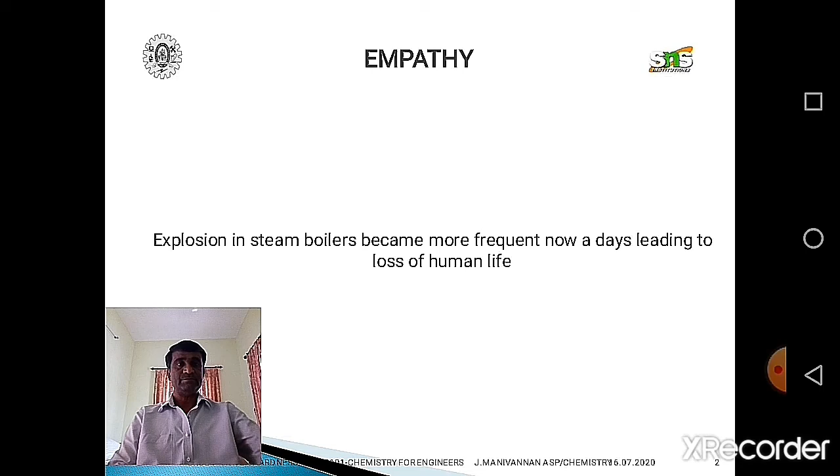Empathy part. Explosions in steam boilers have become more frequent nowadays, leading to loss of human life. We know the two important applications of water in industry. One is for heating purpose, where the water is used for generation of steam, and the second important application of water in industry is for cooling purpose, where it is used in cooling towers and the cold water is used for cooling of reactors, vessels and all.

In thermal power plants, the fuel coal is used to generate steam from water, and high pressure steam goes and runs the turbine, which in turn runs the generator to generate electricity. So water is required for generation of steam, but whatever water is available cannot be used in a steam boiler. We need good quality boiler feed water. If the quality of the water is poor, it has got its own consequences.

Now let us see what are the causes of boiler explosion. Poor water treatment prior to using the water as boiler feed water, and because of that there will be scale and sludge formation, boiler corrosion. These are related to water. Then overheating, low water level, and safety valve malfunctioning.

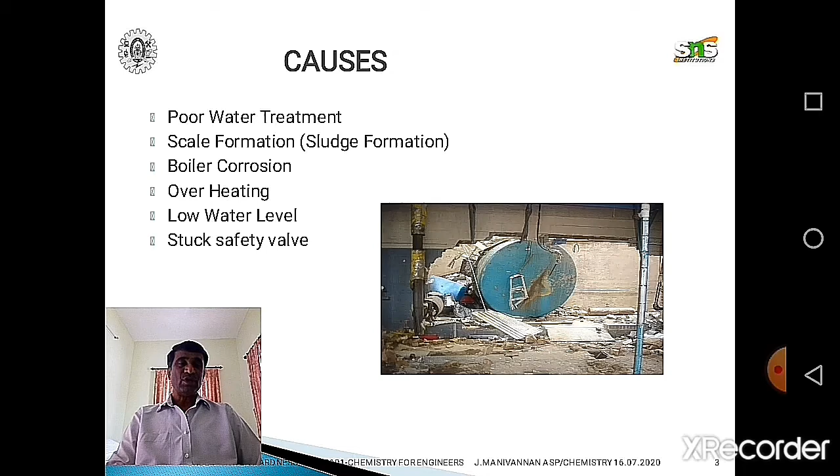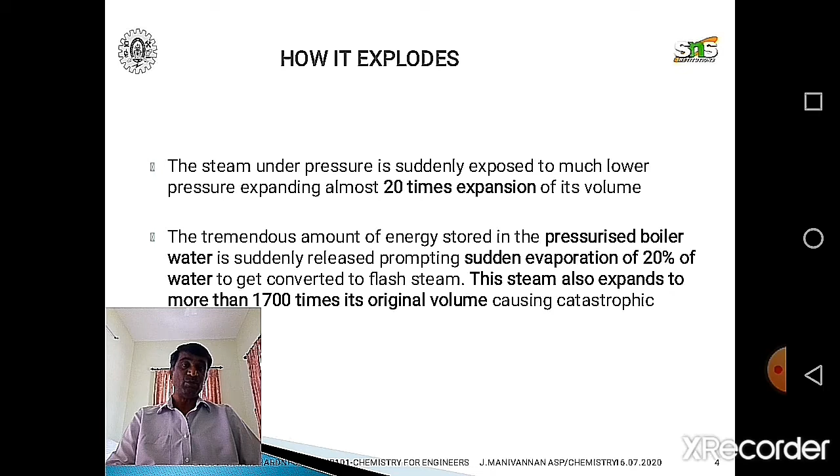How does it explode? The steam which is under pressure, when it gets a vent, expands 20 times, and also the remaining hot water also expands; at least 20% of the water becomes steam, boiling water, which expands 1700 times. So the amount of expansion will be severe, which leads to explosion.

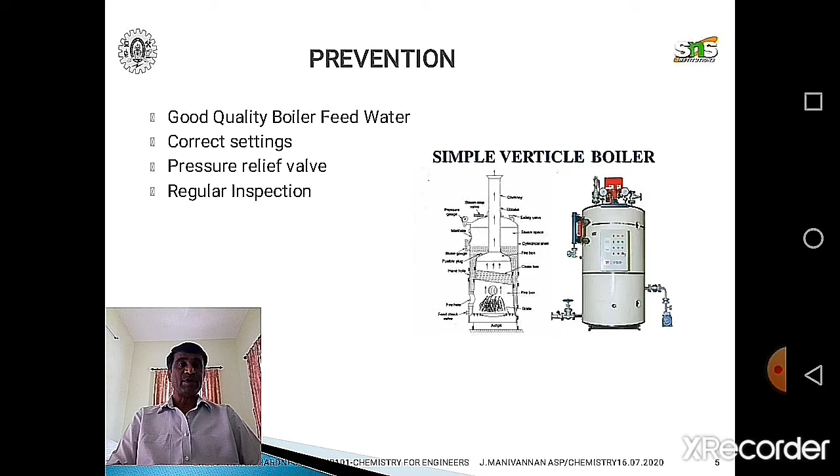How to prevent boiler explosion? We need to use good quality boiler feed water, correct settings, pressure relief valve, proper functioning of the pressure release valve, regular inspection. Now let us come to the quality of water.

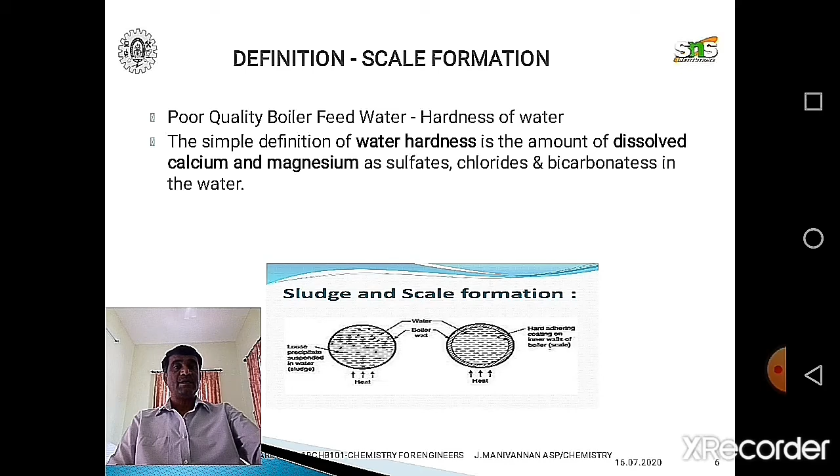The water available for usage may not be good water. The main quality problem of water is due to its hardness. The hardness is due to presence of calcium and magnesium salts as sulfates, chlorides and bicarbonates. They form either sludge or scale. Sludge is nothing but floating precipitates, or precipitates in the suspended form. And scale is the formation of an adhering coating on the inner walls of the boiler.

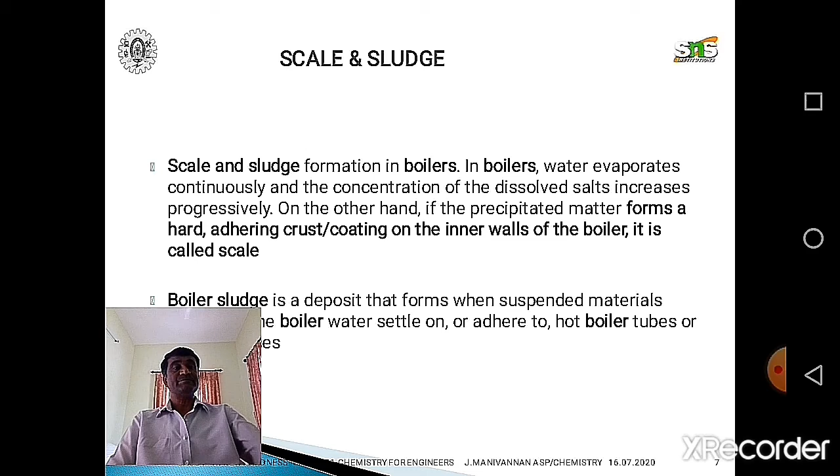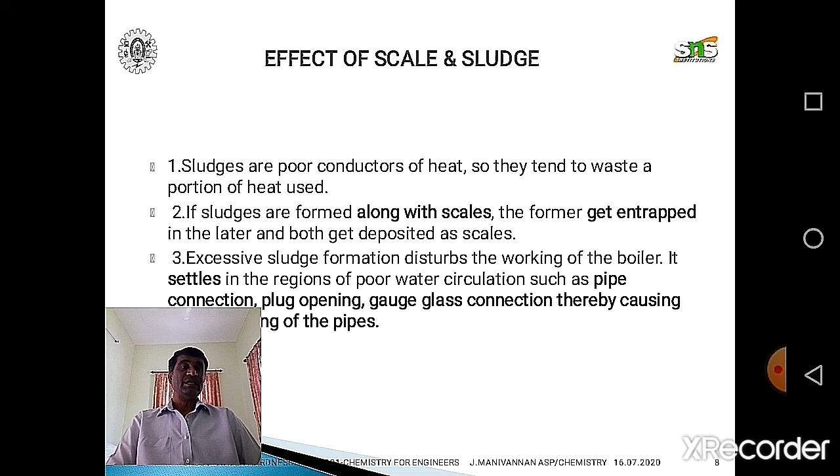What are the effects of this scale and sludge? Sludges are poor conductors. They tend to waste a portion of heat, and along with scales they get entrapped in various pipe connections, plugs, gauges, thereby creating problems. But the scale, which forms a hard coating on the inner walls of the boiler, being an insulator, reduces the amount of heat transferred. So we need to heat more to generate the required steam.

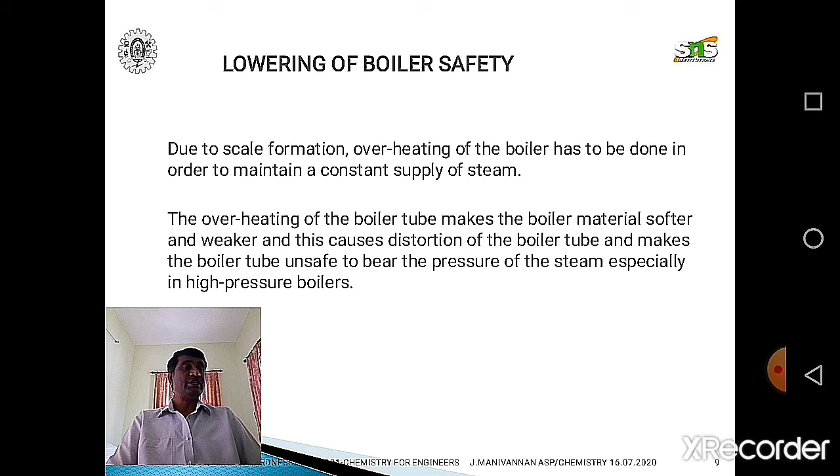The temperature is increased, which in turn means we use a lot of fuel, wastage of fuel, and in extreme cases, when the coating of this scale becomes thicker and thicker, at a stage some part of this scale gets broken, and that part gets exposed to very high temperature, which leads to sudden formation of a higher quantity of steam, which leads to boiler explosion. So we need to use proper quality boiler feed water.

There are two important methods by which the water is treated and then used as boiler feed water. One method is the demineralization process, where the water is made to pass through two types of resins: one cation exchange resin, another an anion exchange resin. The cation exchange resins have exchangeable hydrogen ions, which replace the cations with hydrogen. That means the resin takes up the cations from the water and gives out hydrogen ions.

And then that water passes through the anion exchange resin, where the resin takes up the anions and gives out hydroxyl ions. So when the water passes through these two resins, all the cations and anions will be removed.

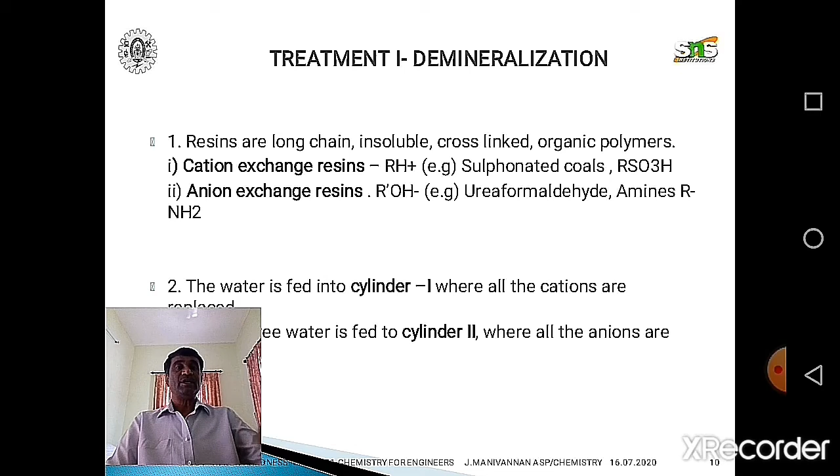And the water goes to the second chamber, where all the anions, sulfates, chlorides, etc. are absorbed by the resins and it gives out the hydroxyl ion. The hydrogen ion and the hydroxyl ion combine to form water, and all the water which is coming out of the second chamber will be free from both cations and anions.

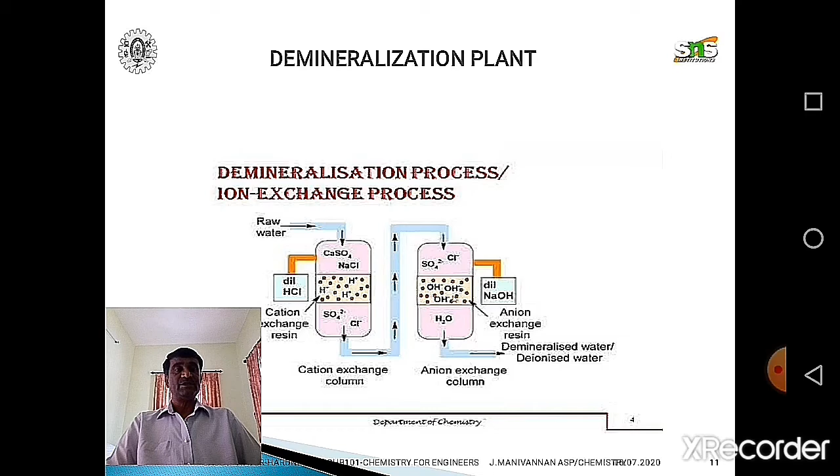So by the demineralization process or deionization process, it's also called a soft water plant, all the ions, both cations and anions, will be removed. It is free from all the ions, and is used as boiler feed water. But when you need very high pressure steam, where the temperature is very high and pressure is very high, we need still much better quality of water.

So for this purpose, reverse osmosis is better than the deionization process. The deionization process only removes the cations and anions, which is good enough. But if you want still purer water, the water is passed through the RO process. RO is called reverse osmosis.

Osmosis: when a solvent and a solution are separated by a semi-permeable membrane, the solvent will flow into the solution. This is called osmosis. But when we apply excess pressure in the opposite direction, that is on the solution side, the solution contains both solvent plus solute, the substances, salts.

So when you apply excess pressure, the solvent from the solution gets separated and goes out to the solvent. That means from the impure water, pure water goes through the semi-permeable membrane to the pure water side. So you get pure water out of it. All the impurities are removed.

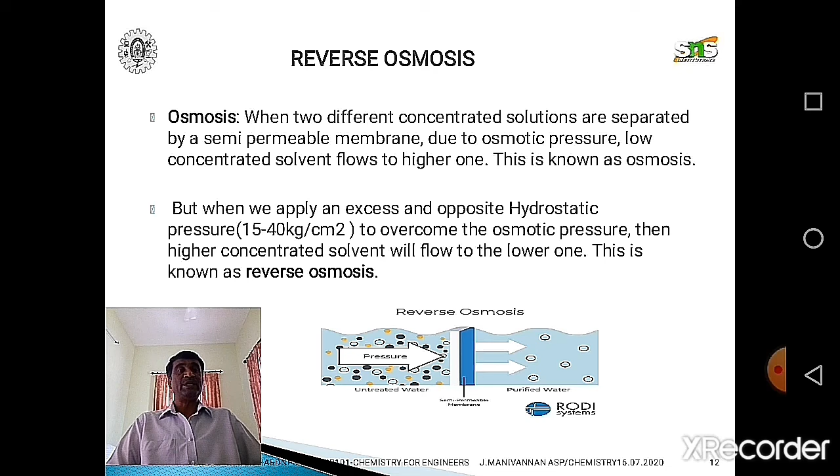So if you use either demineralized water or high purity RO process water, there won't be any problem of scale and sludge formation. But if the boiler feed water is impure, if the treatment process is not done properly, over a period of time,

due to the scale formation, since the scale acts as an insulator, the boilers need to be heated more to generate steam. Heating to high temperature, the quality of the metal of the boiler gets reduced, and over a long duration the thickness of the wall gets reduced, and at some time it may lead to explosion.

So first, the quality of boiler water should be ensured properly during its period of operation for years. Once that is ensured, and if you are assured there is no scale and sludge formation in the water, then the other aspects, other safety measures, are to be checked.